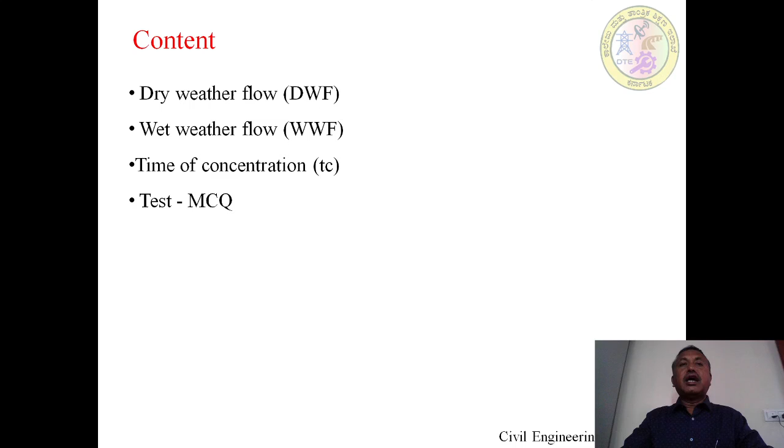In this session 2 we are going to deal about the content of dry weather flow, wet weather flow, time of concentration, and some model questions.

What is meant by dry weather flow? Dry weather flow refers to a flow in a sewer system during the periods of minimum infiltration. That means to say, in the dry condition, the flow of sewage that takes place in a residential, industrial, and commercial areas.

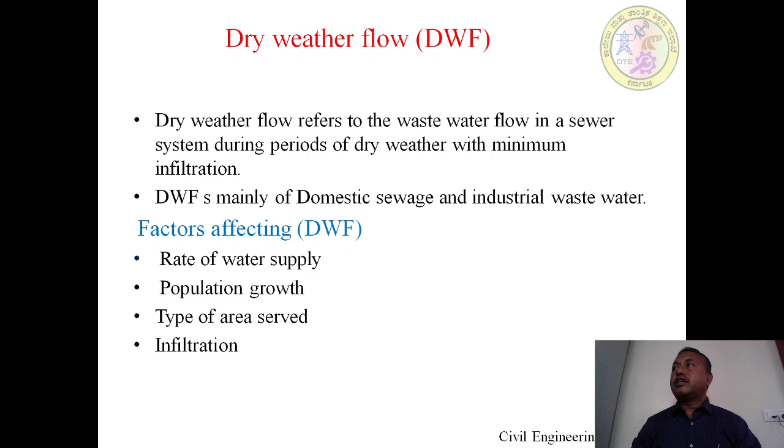What are the factors which are going to play a role in the quantity of dry weather flow? The important 4 factors we have considered here are the rate of water supply, population growth, type of area that is going to be served, and the last one is infiltration.

As the first, we take rate of water supply. The rate of water supply to a city or a town is usually expressed in liters per capita per day. The quantity of sewage produced is always less than the rate of water that has been supplied, because due to some consumption like drinking, cooking, bathing and other residential purposes, some quantity will get utilized.

Therefore, there will always be a reduction in the sewage due to some of the domestic uses listed, like consumption, evaporation, and lawn sprinkling. Whenever firefighting occurs, we have to adopt firefighting arrangements so some quantity will get utilized there, and also in industrial consumption. Some of the industries are going to have water supply facilities, so there will be consumption for the industrial purpose also. By considering all this, while designing our sewerage system, we have to design the sewers, meaning finding the diameter of the sewers.

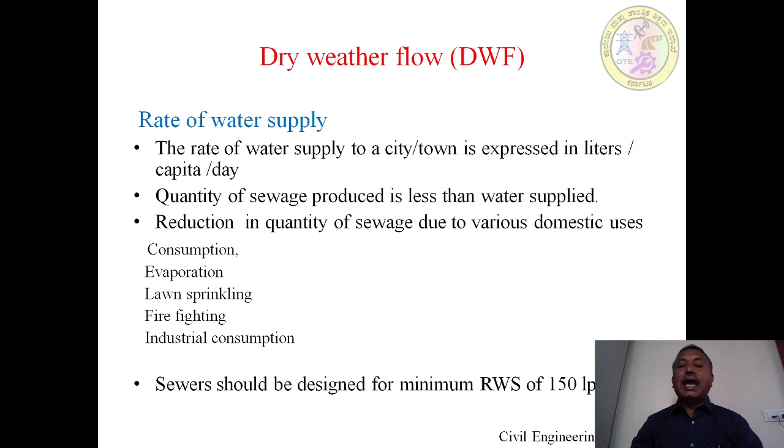We take the minimum rate of water supply as 150 LPCD.

Coming back to the second factor, population growth. Mainly the quantity of sewage produced depends very much on the population in the area that we are going to provide the facility for. For finding the quantity of sewage, we know that the population in that area multiplied by the rate of water supply we are going to supply gives us the quantity of sewage. We also design our sewer by considering a design period for which we are going to design our sanitary system.

Third one, type of the area that is going to be served. As earlier discussed, we are going to serve rate of water supply for different areas. Those areas may be residential, industrial or commercial. Again, quantity of sewage produced depends on the nature and size of industries.

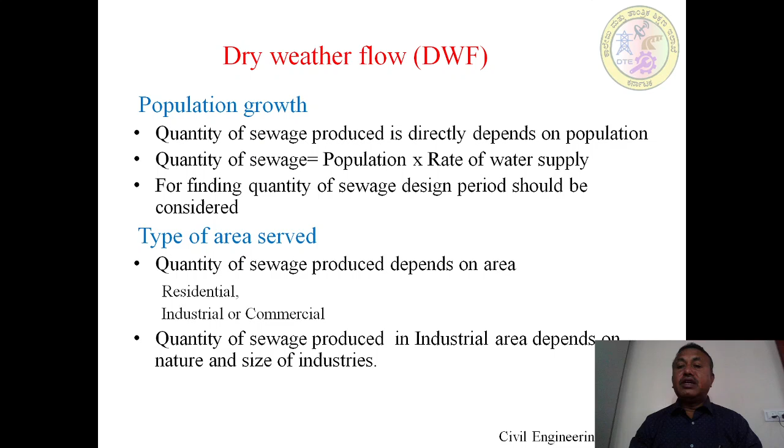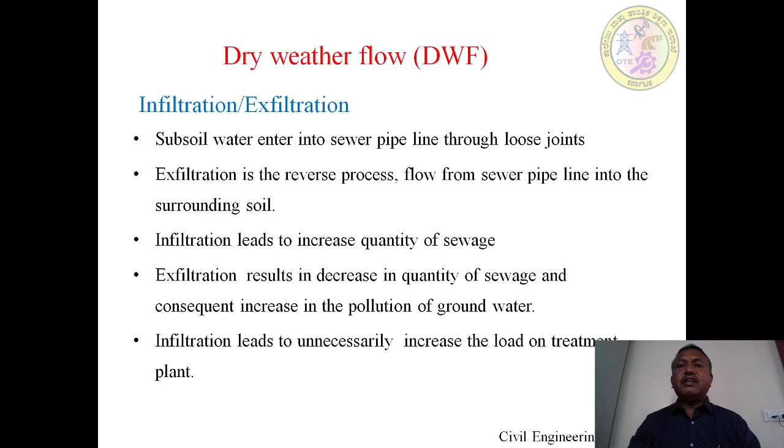Last one, infiltration and exfiltration. This factor plays an important role in the quantity of sewage, in fact dry weather flow. Usually subsoil water enters into the sewer pipeline because sewer lines are laid below the ground through loose joints - this is infiltration. Whereas exfiltration is the reverse process, flow from the sewer pipeline into the surrounding soil mass, so sewage enters into the surrounding soil mass. Usually infiltration leads to an increase in the quantity of sewage, whereas exfiltration results in a decrease in the quantity of sewage and a consequent increase in the pollution of the groundwater. Infiltration also leads to unnecessarily increasing the load on the treatment plant.

Next topic, wet weather flow - that is the flow taking place during rainy season. It is usually called storm water flow, also called wet weather flow. Some portion of the rain usually infiltrates into the ground. The remaining will flow on the ground surface as runoff, including flow on different surfaces like pavements, house roofs, and other areas. There are some factors which are going to affect storm water.

They are listed below: rainfall intensity and duration, area of the catchment where rainfall is going to fall, slope and shape of the catchment - this is very important - nature of the soil and degree of porosity like sandy soil and hard soil, and initial state of the catchment, whether it may be dry or wet.

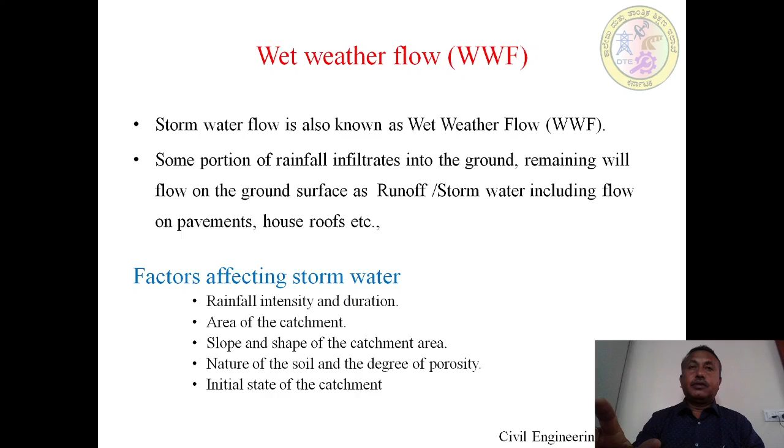You have two schematic pictures you can visualize. On the left hand side you have vegetation, and on the right hand side you have an urban area. On the left hand side, due to the vegetation, the infiltration is more when compared to the urban area, where the urban area is paved.

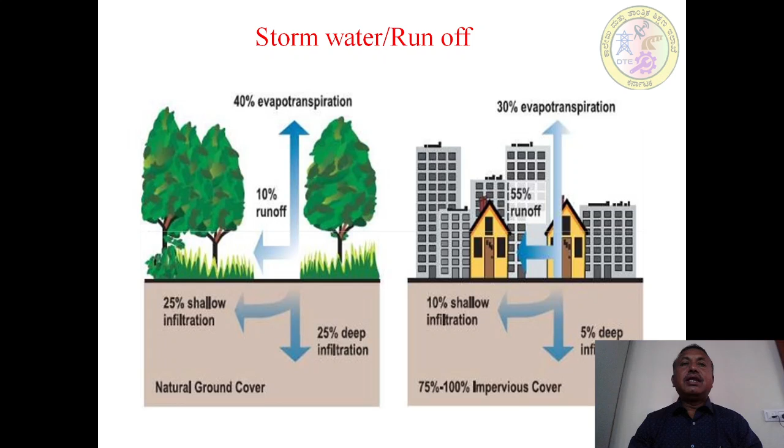In the vegetated area, there will be shallow infiltration and deep infiltration, adding to the natural ground cover. Whereas in the impermeable layer in the cities, we have less shallow infiltration and deep infiltration. That's why runoff will be more in urban areas, whereas surface runoff will be less in the vegetated area.

Regarding the next topic, estimation of quantity of storm water. Usually there are two methods. The first will be the rational method and the second will be the empirical formula method, which are used for finding the quantity of storm water.

In the rational method, to find the storm water discharge, we have the formula Q equals CIA divided by 360, where Q is the quantity of storm water, measured in meter cube per second. C is the coefficient of runoff, depending upon the characteristics of the catchment. I is the intensity of rainfall, and A is the area of drainage, measured in hectares.

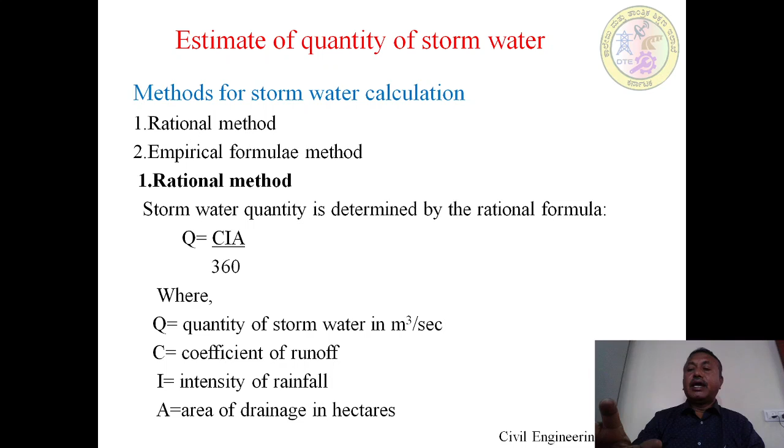Coming to finding the coefficient of runoff. Runoff coefficient depends mainly on the characteristics of the ground, such as porosity, wetness, ground cover, etc. Runoff coefficient varies from 0.01 for forest and wooded areas, to 0.95 for watertight surfaces. Where 0.01 is there, infiltration rate is high; where 0.95, they are impermeable in nature, so infiltration is absolutely less, therefore runoff will be more.

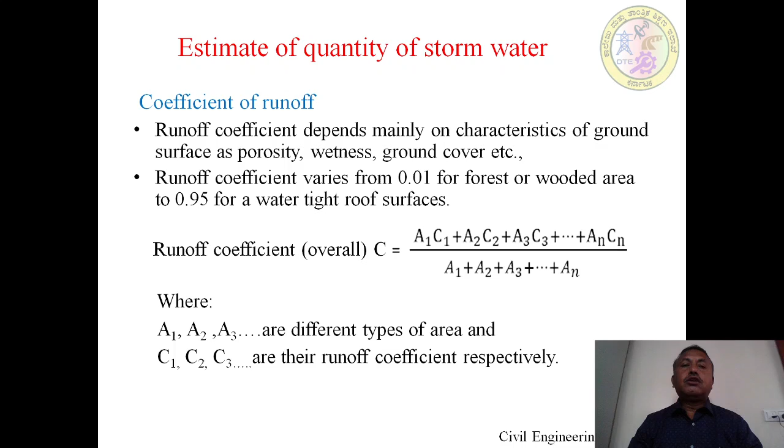Depending upon this, we find out the runoff coefficient as a whole with respect to different areas and different characteristics of the catchment, using the formula: (A1C1 + A2C2 + A3C3 + ... + ANCN) divided by (A1 + A2 + A3 + ... + AN), where A1, A2, A3 are different types of areas, and C1, C2, C3 are their respective runoff coefficients.

By this time, we look at a table showing different runoff coefficients for various surfaces based on studies. The list includes watertight roofs, asphalted cement streets around 0.85 to 0.9, Portland cement streets around 0.8 to 0.95, paved driveways and walks 0.75 to 0.85, and gravel driveways and walks 0.15 to 0.3.

Similarly, for residential areas: single family areas 0.3 to 0.5, where impermeability is less, and multi units 0.4 to 0.6. These again depend upon the soil and slope.

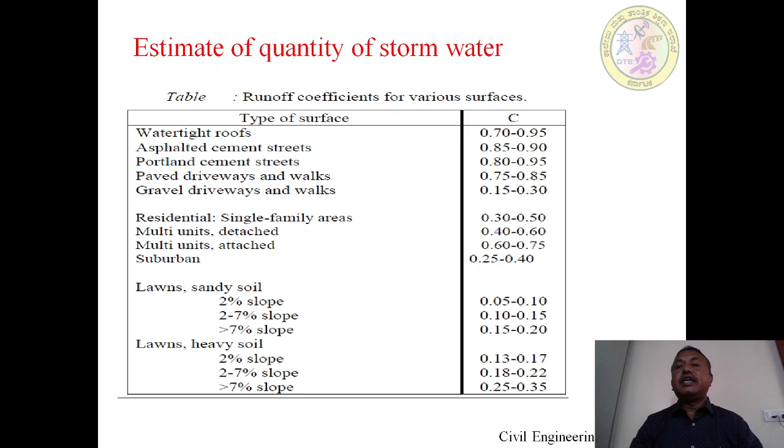For sandy soil at 2% slope, the coefficient is 0.05 to 0.1, whereas for 2 to 7% slope, it is 0.1 to 0.15. For heavy soil at 2% slope, the impermeability factor increases to 0.13 to 0.17 because infiltration rate is less and coefficient becomes more. At 2 to 7% slope, it is around 0.18 to 0.22, and for more than 7% slope, it is 0.25 to 0.35.

Now the second method, the empirical formula method. Usually empirical formulas are applicable only under certain specific conditions such as slope of land, imperviousness, and rate of rainfall. Considering all these three factors, different authors have developed various formulas.

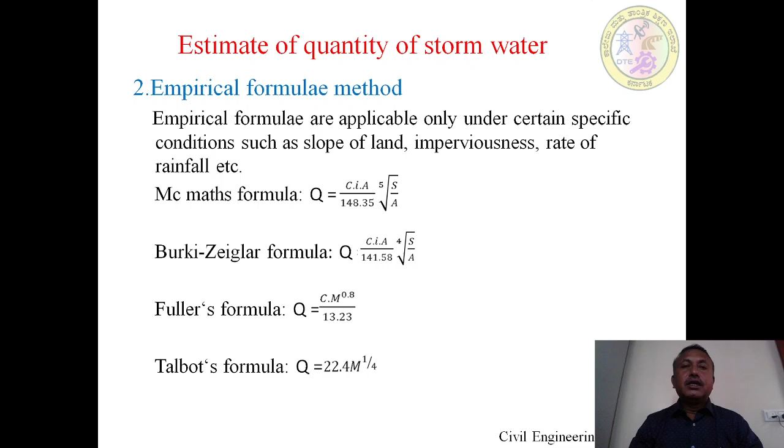McMath's formula: Q equals CIA divided by 148.35, times the fifth root of S by A. Burkli-Ziegler formula: Q equals CIA divided by 141.58, times the fourth root of S by A. Fuller's formula: Q equals Cm to the power of 0.8 divided by 13.23. Talbot's formula: Q equals 22.4 m to the power of 1 by 4. Fanning's formula: Q equals 12.8 m to the power of 5 by 8.

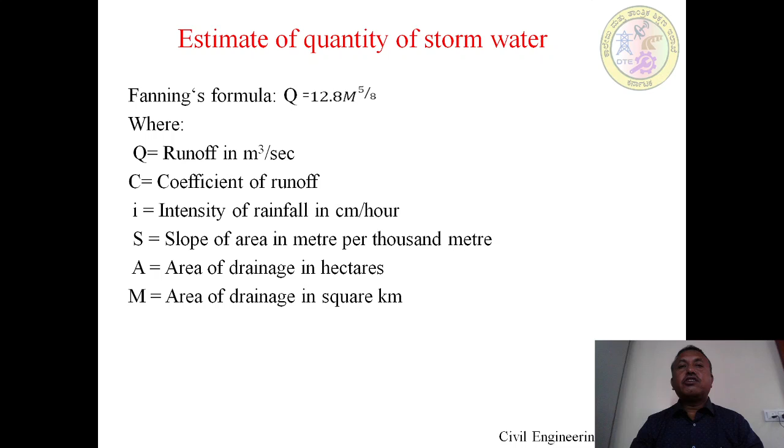In all these formulas, A is the area of drainage in hectares, whereas M is the area of drainage measured in square kilometers under different formulas. The remaining terms, Q, C, I and S, are the same for all: Q, runoff, is in meter cube per second; C is the coefficient of runoff; I is the intensity of rainfall, measured in centimeters per hour; and S is the slope of the area in meters per 1000 meters.

In order to find out the intensity of rainfall, the empirical formula developed by the British Ministry of Health is given by I equals 760 by T plus 10, where I is the intensity of rainfall measured in millimeters per hour, and T is the duration of the storm. This first equation applies for small storm durations, around 5 to 20 minutes. A second formula gives intensity of rainfall for storm durations of 20 to 100 minutes. Usually T is measured in minutes, whereas intensity is expressed in millimeters per hour.

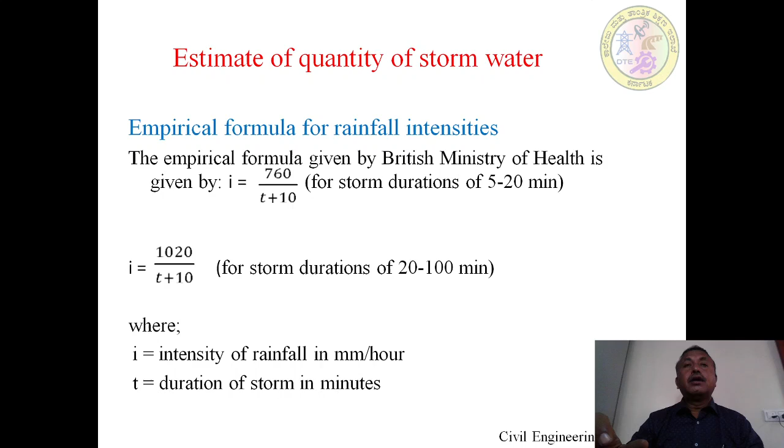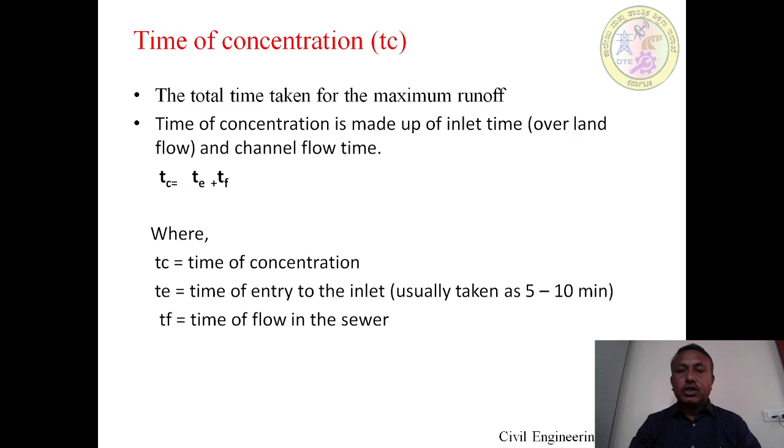Coming to the topic of time of concentration: it shows the reaching time of water once precipitation starts, meaning the total time taken for the maximum runoff to take place. Time of concentration is made up of two parts: inlet time and channel flow time. Mathematically, Tc equals Te plus Tf, where Tc is time of concentration, Te is time of entry into the inlet, and Tf is time of flow in the sewer.

By knowing all these concepts about dry weather flow, wet weather flow, and finding the quantity of storm water, and also the time of concentration, we understand how water enters into a sewer line. Knowing all these factors helps us understand the relevant differences and importance of these topics, so we will now go through these multiple choice questions.

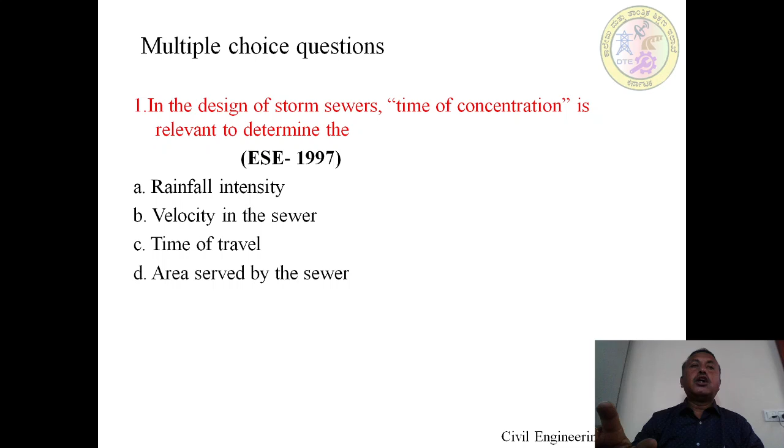First question: in the design of sewers, the time of concentration is relevant to determine what? Options are rainfall intensity, velocity in the sewer, time of travel, or area served by the sewer. Time of concentration always deals with the rainfall intensity, that is, how much time the rainfall has taken place. That's why the answer is option A, rainfall intensity.

Second question: for the design of a storm sewer in a drainage area, if the time of concentration is 20 minutes, then the duration of rainfall is usually the same as the time of concentration. Options are A) 10 minutes, B) 20 minutes, C) 30 minutes, and D) 40 minutes. So the answer is choice B, 20 minutes.

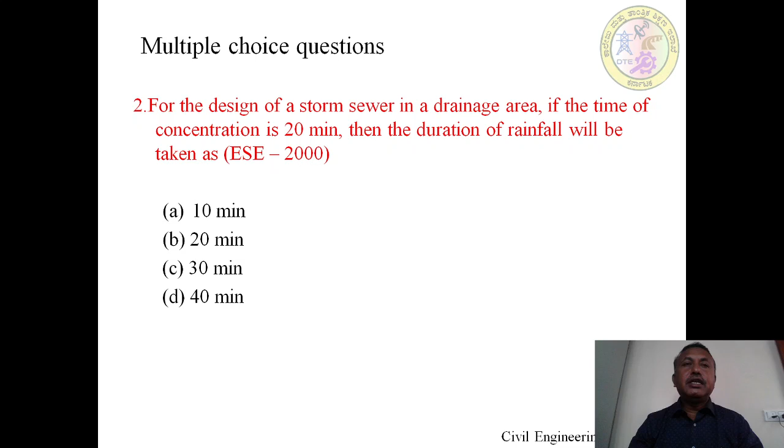Third question: what is the flow through sewers available during the non-rainfall period, meaning absence of rainfall? Whatever water has been supplied gets converted into sewage in residential, commercial and industrial areas. So the sewage produced in dry conditions - the answer is C, dry weather flow, irrespective of the other choices A, B and D.

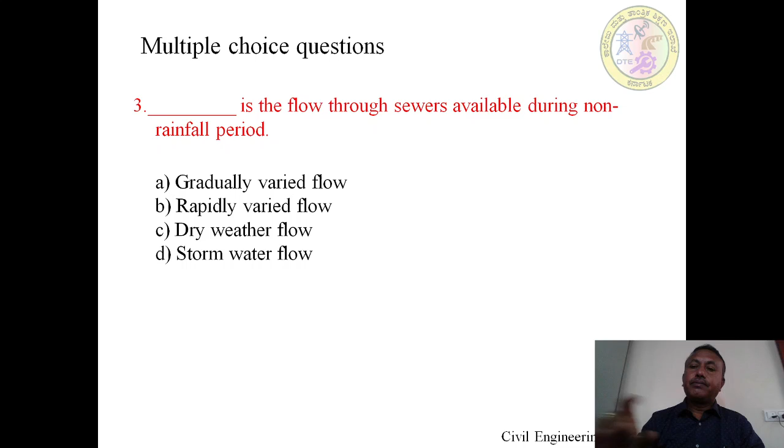Fourth question: what is the additional flow occurring during rainy season? Options are gradually varied flow, rapidly varied flow, dry weather flow, or storm water flow. As we know, additional flow during rainy season is due to precipitation. Whatever runoff flows over the ground surface reaches the sewers as storm water flow. So our answer is option D.

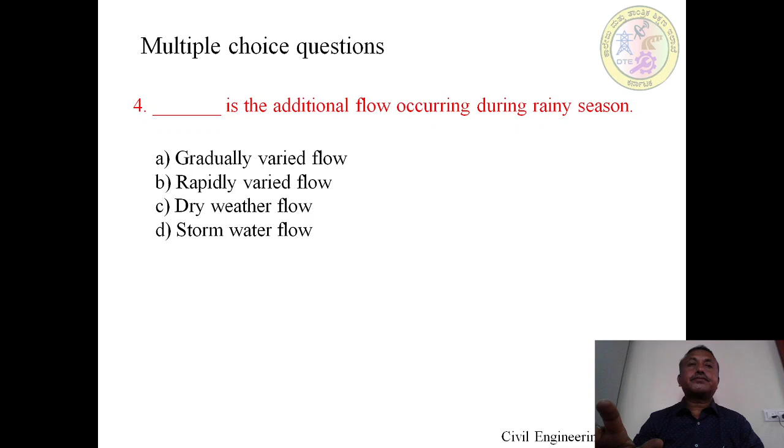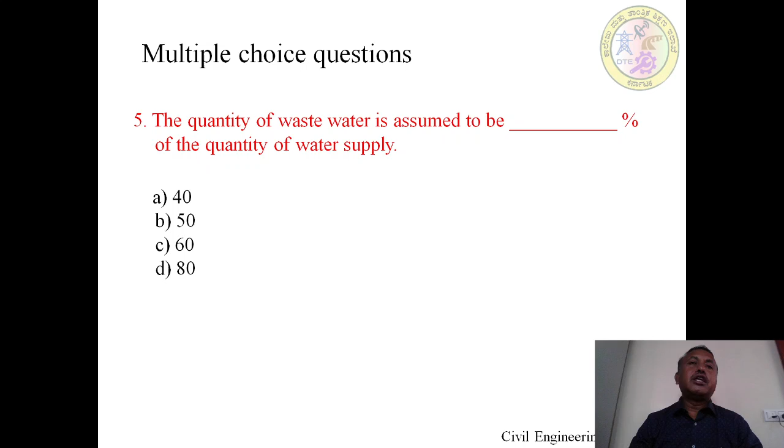Fifth question, a very important one: the quantity of wastewater is assumed to be what percent of the quantity of water supplied? As we know, after consumption and various uses, water gets converted into wastewater. Some consumption occurs through drinking, evaporation and other things. That's why usually it's 80%. Options are A) 40, B) 50, C) 60, D) 80 - 80% of the water supplied gets converted into wastewater. Therefore, option D, 80.

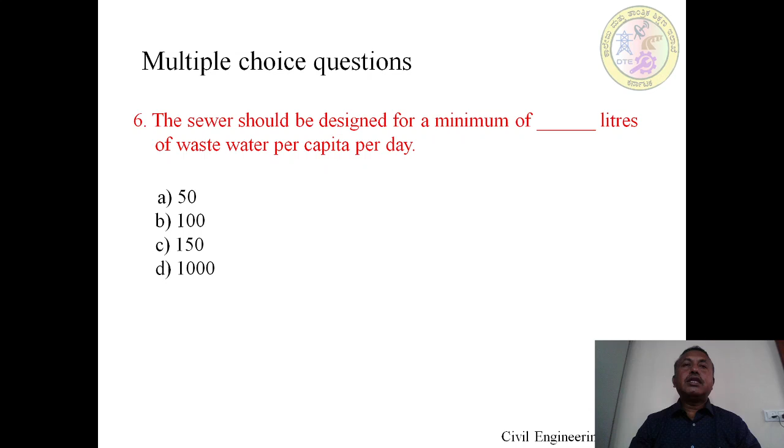Sixth question: the sewer should be designed for a minimum of how many liters of wastewater per capita per day? As we know, while designing the sewer line, we must consider the population and rate of water supply. We know population from census records, but the rate of water supply minimum we have to take is option C, 150 liters, for the design of the sewer.

Seventh question: the size of the town is 15,000, meaning population is around that figure - what is the density of population per hectare? Options are A) 50, B) 75, C) 100, D) 200. The answer is D, 200 population per hectare.